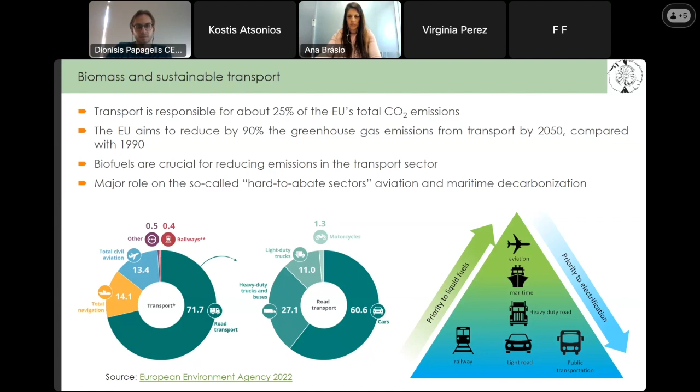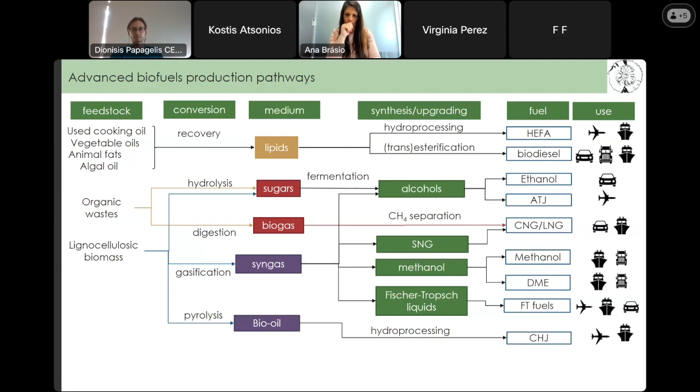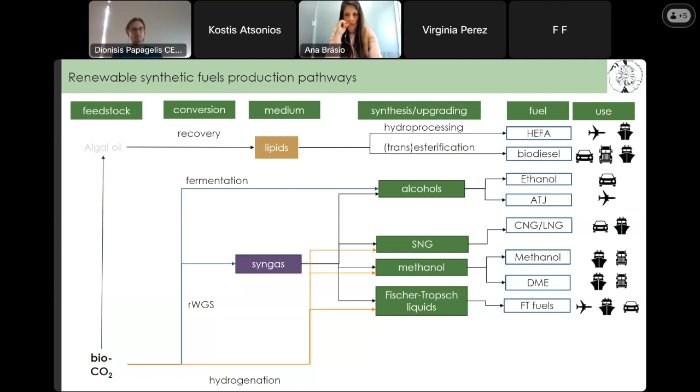Apart from these pathways dealing with the valorization of sustainable biomass like biogenic residues and waste, there is also another option to produce renewable synthetic fuels using carbon dioxide from low carbon applications like bio-based industries or other biogenic derived carbon dioxide. In that case, carbon dioxide can be converted into syngas or lipids, and almost the same list of fuels can be produced through catalytic, biological, and other processes.

Now, in this presentation, I'm going to present the progress made in four interesting European funded projects that deal with the development of new pathways and processes for the production of advanced biofuels and renewable synthetic fuels. In this slide, I summarize the pathways I'm going to talk about.

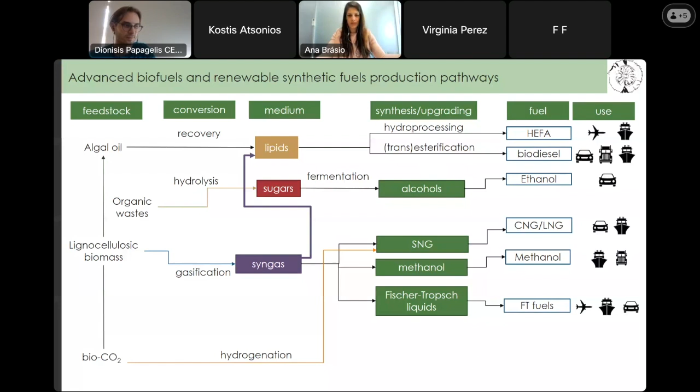Starting with the first project, which is Biosfera. Biosfera deals with the production of drop-in biofuels for aviation and marine applications through a novel combined thermochemical and biochemical pathway. The main goal is to develop this new concept, based on a two-step biological process that converts syngas from biomass gasification to microbial oils, and these oils undergo hydrotreatment, and the final product is hydrotreated triglycerides that can be regarded as a drop-in biofuel.

The key benefits of this process are fuel flexibility, because the biomass technology we employed has proven ability to valorize different kinds of biomass feedstock from different origins; the minimization of gas cleaning steps because of the ability of the microbes to sustain certain impurities in the syngas; the low OPEX; and enhanced yields of the target biofuels.

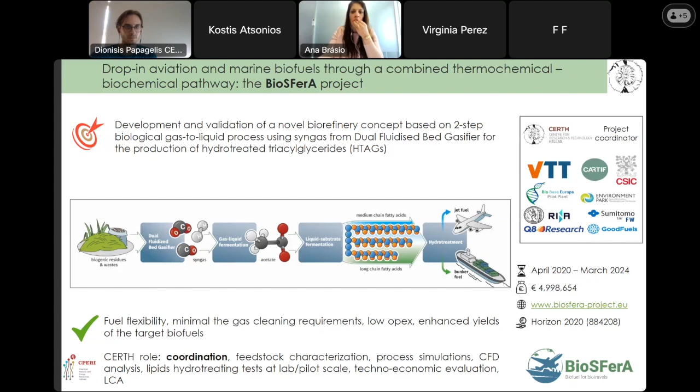Our role in this project is, first of all, we were the project coordinator. I say were because this project ended last March. We undertook the characterization and analysis of the feedstock and the selection of the most promising ones, process simulations through Aspen Plus software, numerical simulation through CFD analysis, and lipids hydrotreatment at both lab and pilot scale. And also the key horizontal activities like techno-economic and environmental evaluation through TEA and LCA analysis.

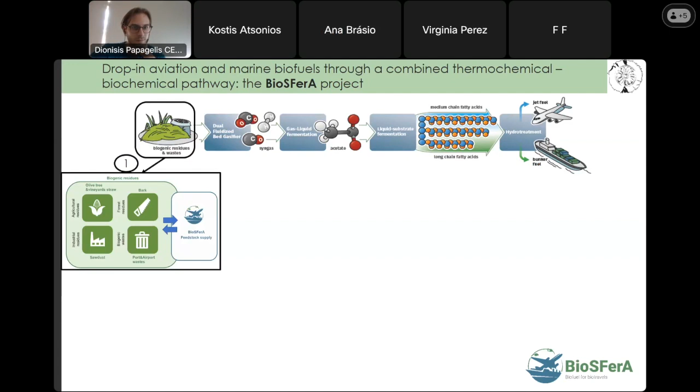I would like to present the overall concept. The concept starts with the different kinds of biogenic feedstock, like agricultural waste, forest residues, industrial residues, and waste from biogenic origin. And this solid feedstock is converted into syngas through a dual fluidized bed gasification.

This type of gasifier does not need pure oxygen to operate, so in that case we get rid of the necessity to build a cost intensive and energy demanding air separation unit, and produce raw syngas after very specific and certain gas cleaning steps like tar removal.

This is the feedstock for the production of a new type of oil, which is microbial oil, through a novel two-step biological process, where in the first step, syngas is converted into acetate through an anaerobic fermentation using acetogenic bacteria, and the produced acetate is the substrate for the production of microbial oil using engineered strains of oleaginous yeast within an aerobic fermentation unit.

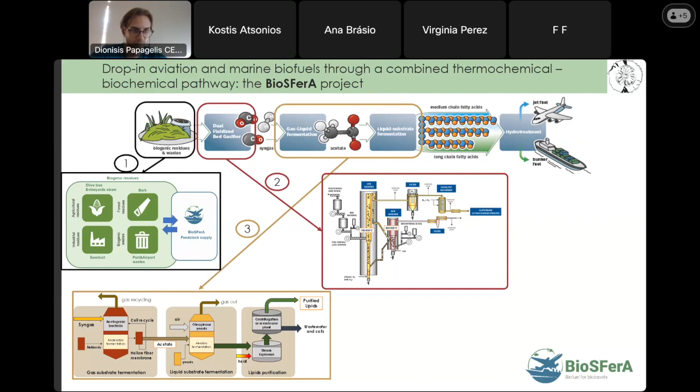This oil exists initially within the cells of the yeast and undergoes purification and extraction through a series of different lipid purification steps. And the microbial oil that is purified is sent to a hydrotreatment reactor where, through catalytic conditions under high pressure and temperature, it is converted into paraffinic compounds and alkanes that, after fractionation, are the basis for the production of the final products, which are the biojet fuel and diesel-like biofuel, bunker fuel.

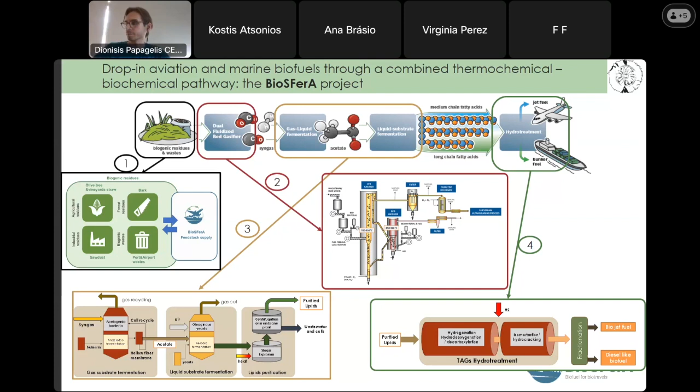And through these 4 years of the project, we managed to perform lab activities in the overall value chain of the process, starting from the gasification up to the final liquid fuel product at the lab scale. These activities were important in order to optimize each step, and based on the scale.

Kostis, I don't know if you can hear us. I don't know why. I can hear you. Can you hear me? Yes, there was a minor hiccup. If you could just repeat the last 10 seconds of just this page. Ah, okay. Okay.

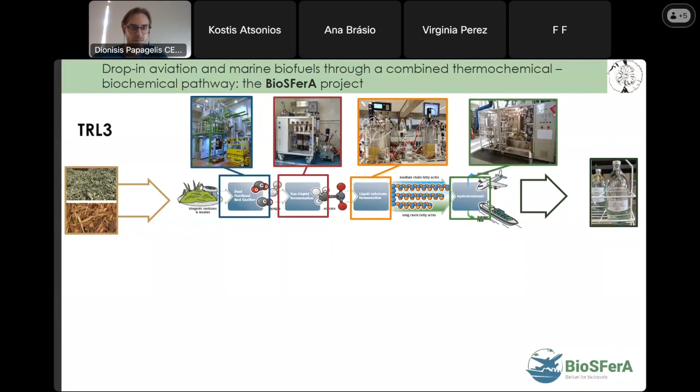In a nutshell, I would like to show that during these 4 years, we aimed to perform the necessary lab scale activities in the whole value chain for the optimization of the process parameters in each step, and based on that, we performed the pilot activities at TRL5 in the overall value chain as well.

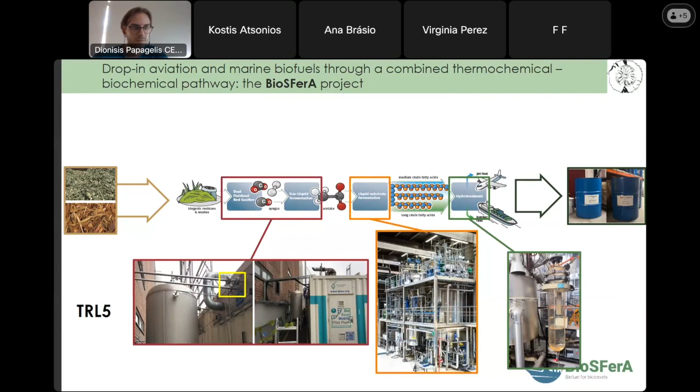And some key facts from this project that ended last month is that we successfully performed gasification, gas cleaning and gas fermentation pilot campaigns, and we managed to produce acetate with a production rate of 0.77 grams per liter per hour. We proved that fewer syngas cleaning steps are required than in thermocatalytic pathways like Fischer-Tropsch synthesis.

For the lipids production, we performed liquid fermentation tests with three different substrates like acetate, glucose, and glycerol, achieving quite a good rate of 0.26 grams per liter per hour. Very important is that no intermediate purification step is needed between the acetate production and the liquid fermentation process.

From the energy analysis and the techno-economics, we estimate that the overall plant energy efficiency was at 35.6%, with almost 25.4% of total carbon utilization, where the minimum jet fuel selling price was estimated at 1.83 euros per liter.

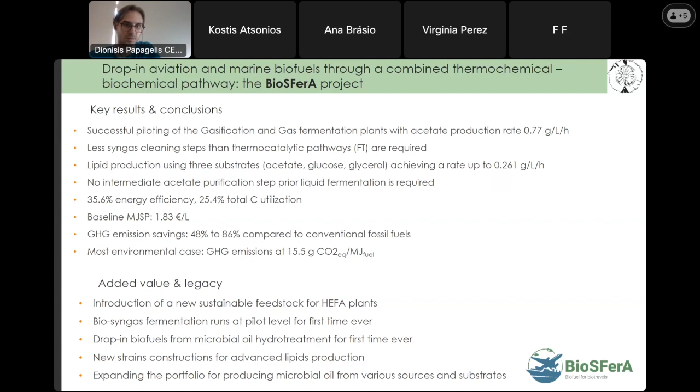The second project is called Clara, and this project's main scope was to develop a new chemical looping gasification technology, where the produced gas was the basis for the production of Fischer-Tropsch liquids, employing and valorizing biogenic residues at a large pilot unit of 1 megawatt thermal.

According to that concept, the biogenic residues, with similar origins as the previous project, undergo pre-treatment and gasification through this quite novel chemical looping gasification technology. The produced syngas goes into a Fischer-Tropsch reaction for road transport fuels production. And before that, a novel syngas treatment technology through acid gas removal was developed as well.

Our role in that project was to perform the simulations at steady and dynamic conditions, and also to perform the wax hydrocracking tests.

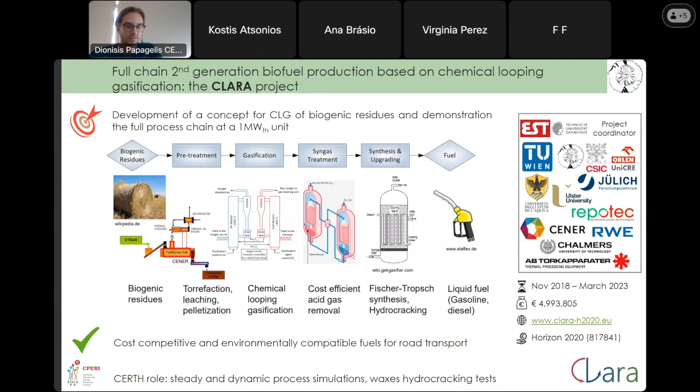Wax was the Fischer-Tropsch synthesis process. This project ends in March of 2023, and the coordinator was the Technical University of Darmstadt from Germany. This is the process flow diagram of this concept, starting from the biomass pre-treatment using a portfolio of different methods like drying, leaching, and pelletization. The treated biomass enters the dual fluidized bed of the chemical looping gasification.

And in that technology, the aspect that makes it different from other technologies is the fact that the oxygen needed for the oxidizing medium of the gasification reactions is not coming from air, but from circulating solid oxides that are oxygen carriers. At first they react with air in a different reactor and get the oxygen from the air, and then they are sent to the fuel reactor, where the oxygen reacts with the vapors coming from the fuel devolatilization.

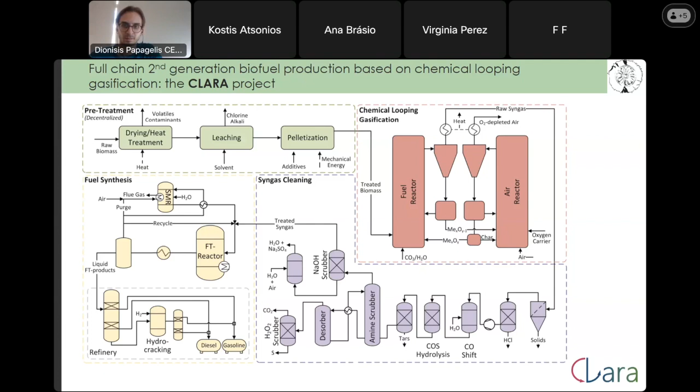The raw syngas undergoes different gas cleaning steps for the removal of all the impurities that may harm the catalyst performance of the Fischer-Tropsch synthesis. And there the FT crude is produced under catalytic conditions and at high pressure and temperature. And the final step is the heavy fraction of waxes undergoes hydrocracking for the production of more valuable products like diesel and gasoline fraction. That also enhances the overall yield of the desired products. This is the schema of the respective activities that were carried out in this project.

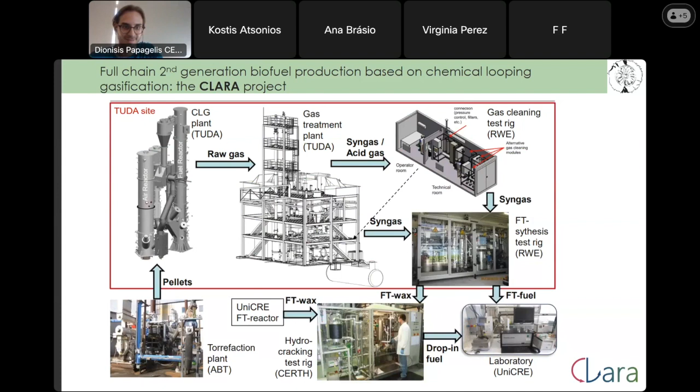Sorry, just to let you know, we're a bit past the 15-minute mark. So, would you like me to finish my presentation or skip to make it faster? No, you just prioritize what is more important, or of course, if you're towards the end, please go ahead and finish normally. Okay, okay.

The third project is FlexSNG, with the project coordinator VTT from Finland. The idea is to develop a flexible and cost-effective gasification-based process for the production of biomethane of pipeline quality that can be used for various purposes, and high-value biochar and renewable heat, using a wide variety of biomass residues and biogenic wastes. The key benefit of this concept is that it is able to switch between different operation modes, either maximizing the biomethane production or producing both syngas for biomethane production and biochar.

Our role here is to perform the design and model development of the overall concept, the CFD simulation analysis, and the analysis from an economic and environmental point of view. I will not get into more details about the concept. Maybe if someone asks later, I will give more detail.

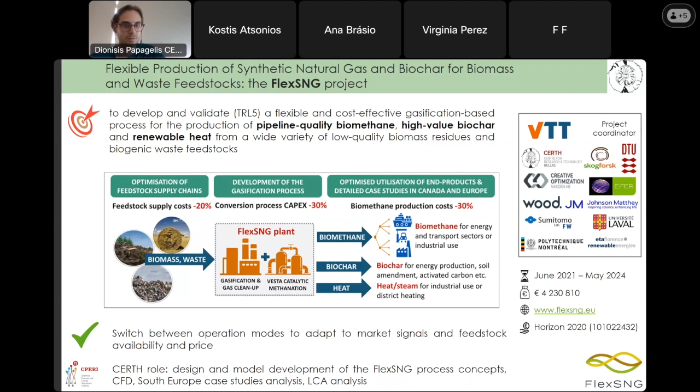The only aspect I would like to mention is that through this concept, the aim is to minimize the cost at different steps that exist in the state-of-the-art bio-SNG value chain, like the elimination of water gas shift, the minimization of oxygen demand, and the introduction of an innovative oxygen transport membrane technology, aiming to achieve a cost saving of around 30%. Also very important is the methanation technology we employ, which simplifies the overall process and minimizes the final biomethane purification steps.

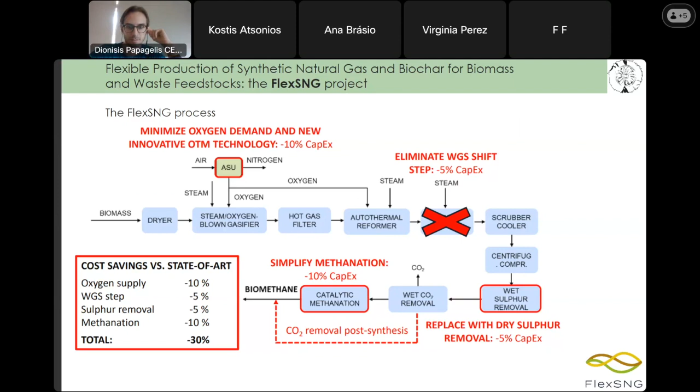And the last project is the FUELPHORIA project, a new Horizon Europe project that aims to demonstrate a portfolio of different technological solutions for the production of both advanced biofuels and renewable fuels of non-biological origin, using sustainable feedstock and renewable energy. That sustainable feedstock includes residues and waste, CO2, and the portfolio of state-of-the-art technologies we are developing is from different domains like biochemical, thermochemical, photobiological, electrochemical, etc. The products will be used for the transport and power sector, and methodological analysis is being developed to maximize the exploitation of the overall concepts and to foster these advanced biofuel technologies at the European level.

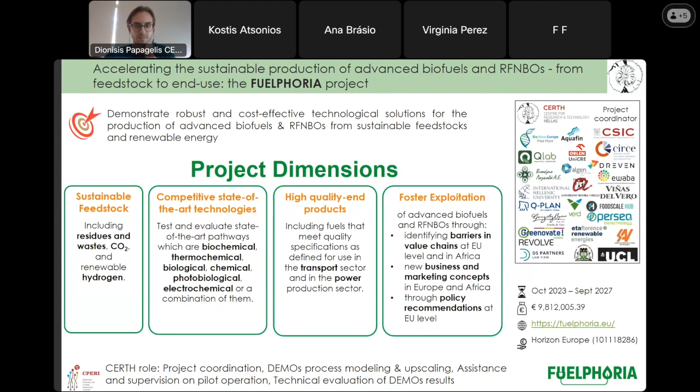Our role here is we are the project coordinator. This project consists of 26 partners. We also have the general overview of the demo supervision and the pilot operation, and are in charge of performing the technical evaluation of the demo results. This is the overview of the demos. Four demos are being developed, two in Spain, one in Greece, and one in Belgium, aiming to produce fuels whose destiny is to cover transport needs in aviation, maritime, and road transport as well. As I said previously, among the feedstock is biogenic CO2 from a winery plant or from a biogas plant, and also organic urban waste from a waste treatment plant.

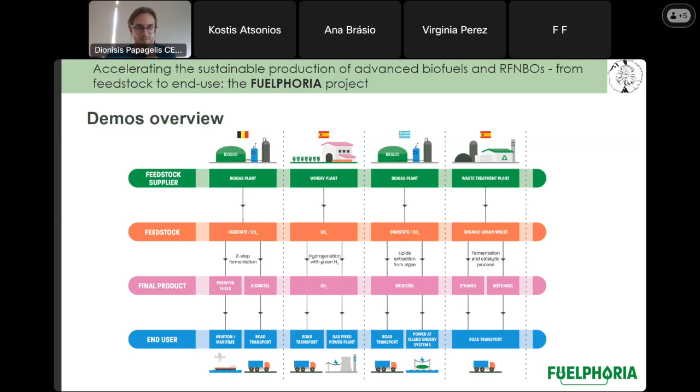And my last slide, the conclusion of my presentation. As seen through these four interesting projects that have been funded by the EU, there are several new technologies with upgraded specifications in terms of performance and flexibility that make advanced biofuels meet the target of decarbonization. Biomass can play a very important role in meeting the demands for sustainable transport.

There are several advanced technologies that offer the possibility to utilize different carbon sources for the production of advanced renewable fuels, also with the use of green and renewable hydrogen. There are high expectations for biofuels, and we expect them to have a leading role in transport, especially in aviation. And our organization, CERTH, has a very active role through its involvement in several EU-level research efforts to foster and develop these technologies for the production of advanced biofuels.